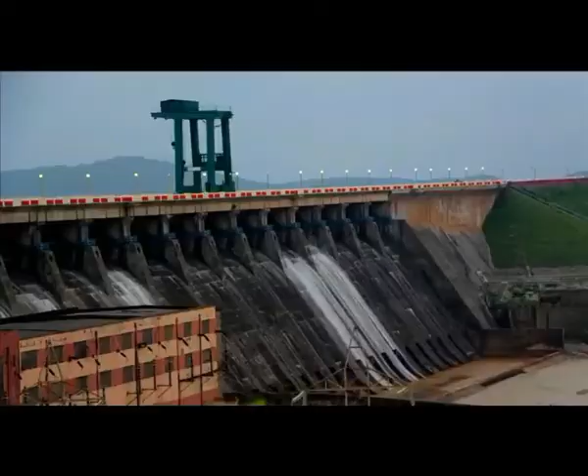For most structures, including buildings, bridges, earthen dams, as well as concrete dams, it is the earth that provides the ultimate support. The behavior of the supporting ground must, therefore, affect the stability of the structure.

The supporting ground is invariably a soil which is weaker than any construction material like wood, concrete, steel, or masonry. Hence, compared to the structural members made out of this material, a large area or mass of soil is necessary, involved in carrying the same load.

Structural foundations are the substructure elements which transmit the structural load to the earth. It is the connecting link between the structure proper and the ground which supports it. The bearing strength characteristics of foundation soil are major design criteria for civil engineering structures.

In geotechnical engineering, bearing capacity is the capacity of soil to support the loads applied to the ground. The bearing capacity of soil is the maximum average contact pressure between the foundation and the soil which should not produce shear failure in the soil.

The load of the superstructure is transmitted to the supporting soil through structural members called footings, which are to be designed properly so as to ensure the shear stress developed on any plane in the loaded soil mass must not be overstressed and does not exceed the shear strength of the soil. In other words, shear failure does not occur.

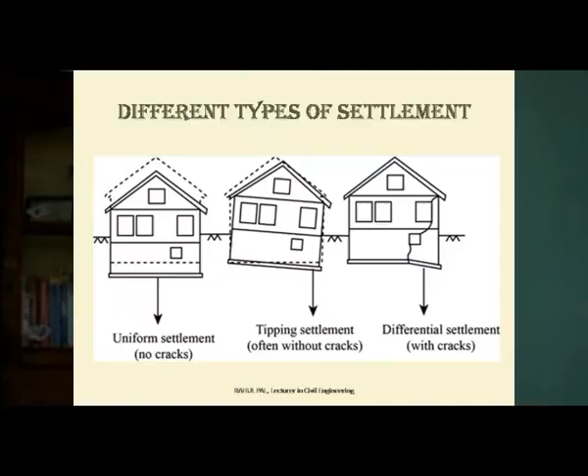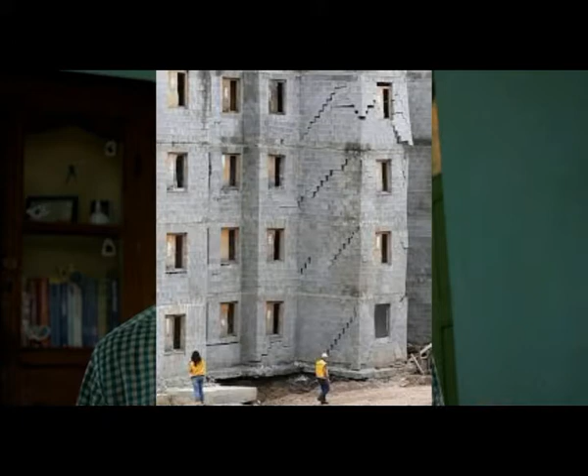Leaving out extreme cases like the Leaning Tower of Pisa, the most common sign of differential settlements is the occurrence of cracks on the structure at an angle of 45 degrees, usually around the openings like doors, windows, etc. Let us now discuss some of the terms related to the bearing capacity of soil.

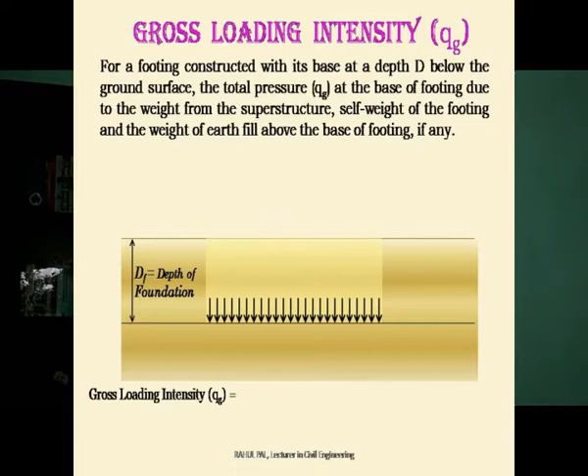For a footing constructed with its base at a depth Df below the ground surface, the gross loading intensity is the total pressure at the base of the footing due to the weight from the superstructure, self weight of the footing and the weight of the earth fill above the base of the footing, if any.

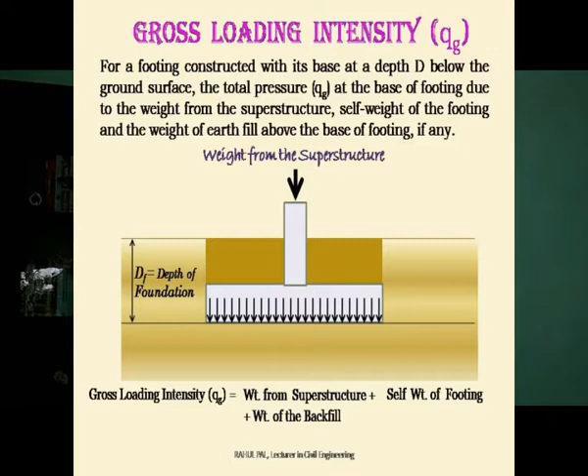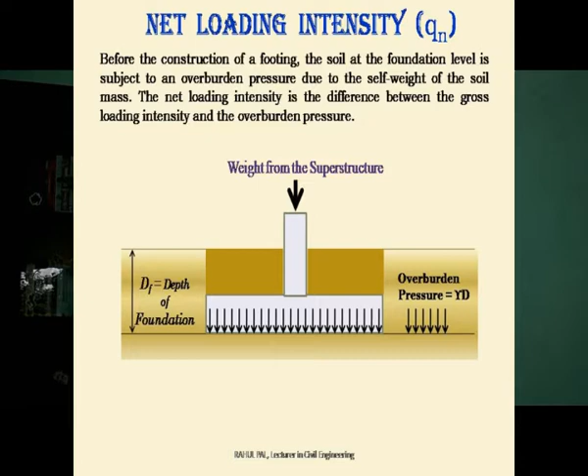Then net loading intensity. Before the construction of a footing, the soil at the foundation level is subjected to an overburden pressure due to the self weight of the soil mass. The net loading intensity is the difference between the gross loading intensity and the overburden pressure.

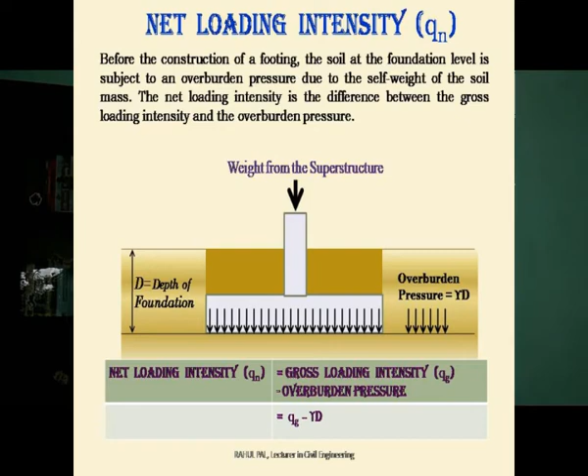If the footing is founded in a soil mass having a unit weight of gamma at a depth Df below the ground level, then net loading intensity is equal to gross loading intensity minus overburden pressure. Then comes ultimate bearing capacity.

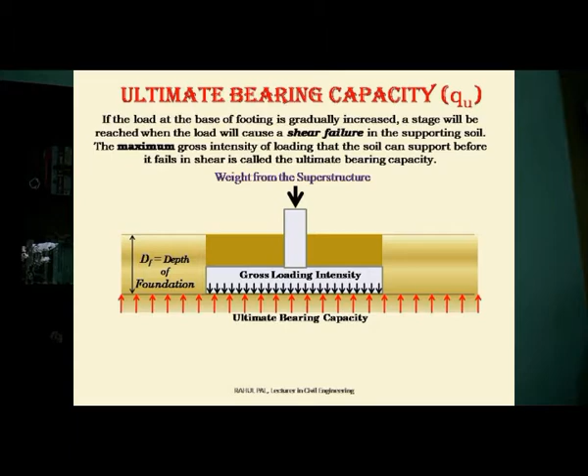If a load at the base of the footing is gradually increased, a stage will be reached when the load will cause a shear failure in the supporting soil. The maximum gross intensity of loading that the soil can support before it fails in shear is called the ultimate bearing capacity.

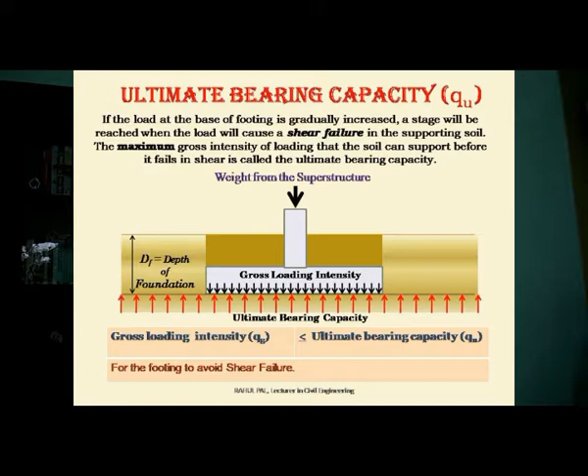So, the gross loading intensity must be less than the ultimate bearing capacity, that is, the maximum capacity that the soil can support. If it is equal to, then it is on the verge of failure.

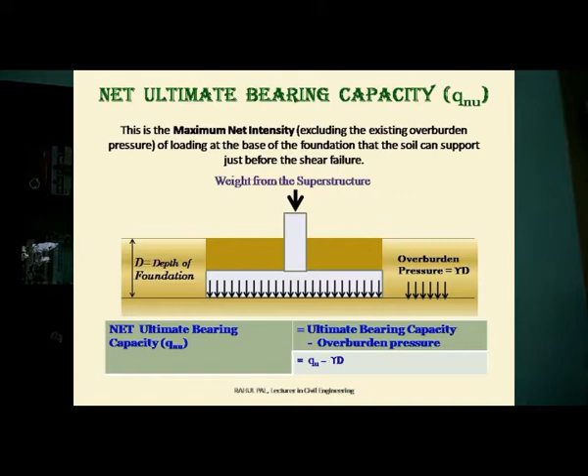Net ultimate bearing capacity is the maximum net intensity of loading, excluding the existing overburden pressure, at the base of the foundation that the soil can support just before the shear failure. Net ultimate bearing capacity is equal to ultimate bearing capacity minus overburden pressure.

Factor of safety. In engineering, a factor of safety, also known as safety factor, expresses how much stronger a system is than it needs to be for an intended load.

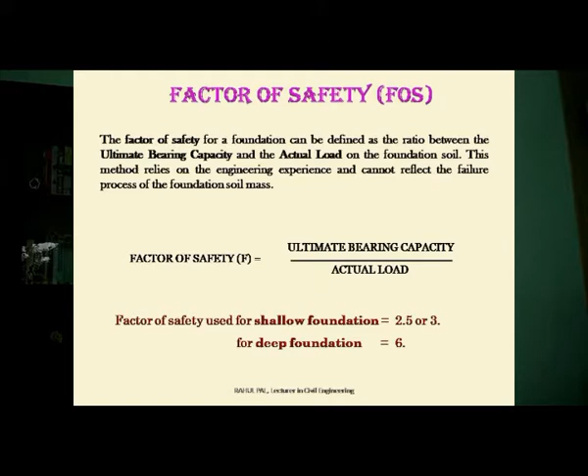The factor of safety for a foundation can be defined as the ratio between the ultimate bearing capacity and the actual load on the foundation soil. Net safe bearing capacity is the maximum net intensity of loading that the soil can safely support without the risk of shear failure. It is obtained by dividing net ultimate bearing capacity by the factor of safety.

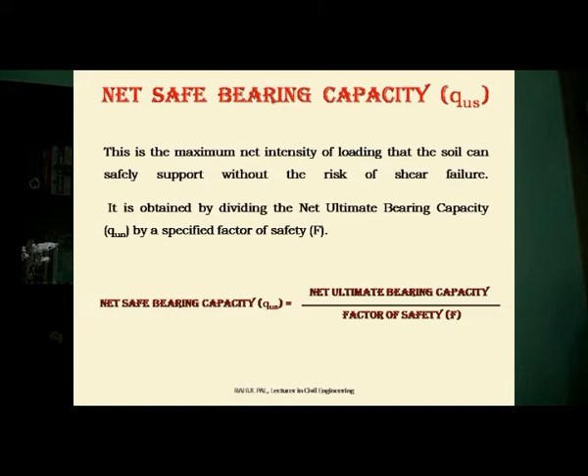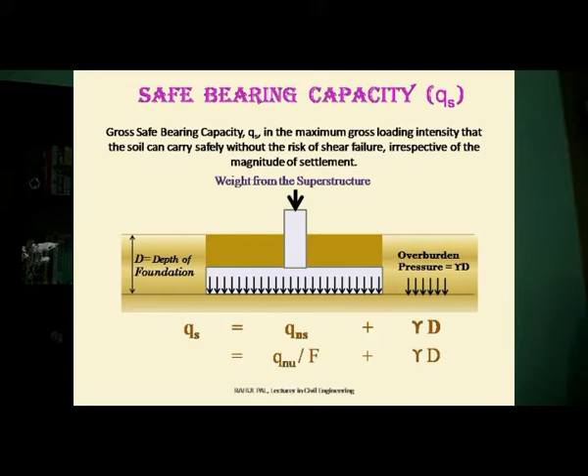Gross safe bearing capacity, denoted by QS, is the maximum gross loading intensity that the soil can carry safely without the risk of shear failure, irrespective of the magnitude of settlement, obtained by adding the net safe bearing capacity with overburden pressure. Finally, the allowable bearing pressure.

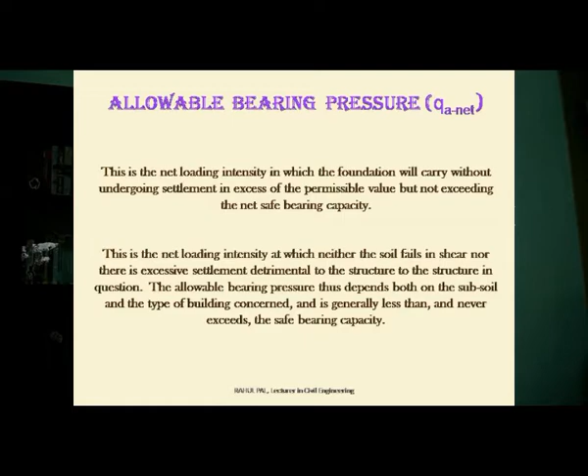It is the net loading intensity which the foundation will carry without undergoing settlement in excess of the permissible value but not exceeding the net safe bearing capacity. This is the net loading intensity at which neither the soil fails in shear nor there is an excessive settlement detrimental to the structure. The allowable bearing pressure thus depends both on the subsoil and the type of building concerned and is generally less than and never exceeds the safe bearing capacity.

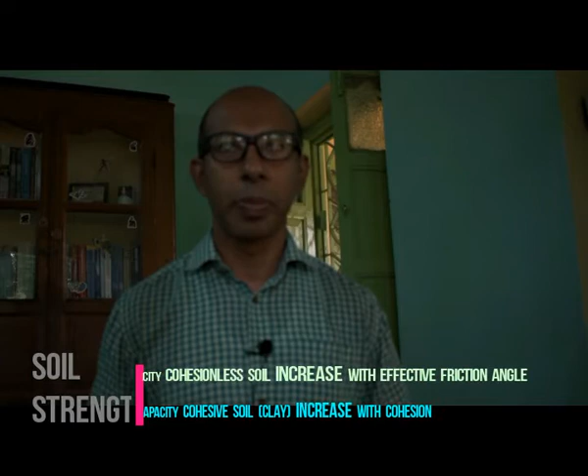The ultimate bearing capacity of soil is influenced by many factors such as, firstly, soil strength. Bearing capacity of cohesionless soil and mixed soil increases disproportionally with the increase in the effective friction angle. However, bearing capacity of purely cohesive soil such as clay varies linearly with the soil cohesion.

Secondly, foundation width. Foundation width affects bearing capacity of cohesionless soil. The bearing capacity of a footing placed at the surface of cohesionless soil, where the soil shear strength is considerably dependent on internal friction, is proportional to the width of the foundation. Bearing capacity of cohesive soil of constant shear strength and infinite depth is independent of foundation width. Foundation depth. The deeper the foundation, the greater the bearing capacity.

Position of the groundwater table has a significant effect on the bearing capacity of soil. Presence of water table at a depth less than the width of the foundation from the foundation bottom would reduce the bearing capacity of the soil. As the water table approaches the ground level, the percentage of submerged soil as well as the pore water increases, hence the effective pressure and the bearing capacity decrease. But when the groundwater table is at a great depth, then it may not affect the bearing capacity of the soil.

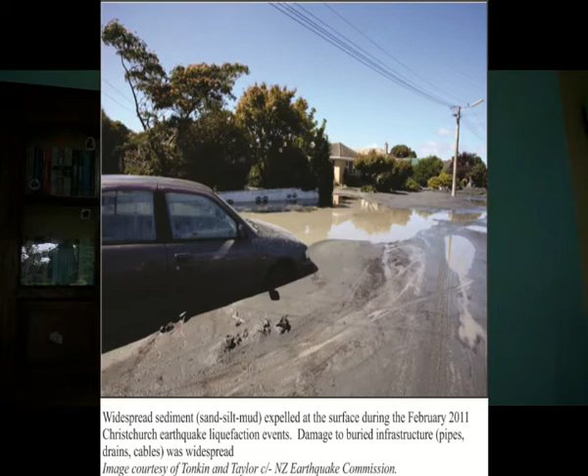The foundation soil can liquefy when the pore water pressure equals or exceeds the soil confining stress. Liquefaction reduces the effective stress to zero and causes gross differential settlement of structures and loss of bearing capacity. Subsurface voids. Bearing capacity of soil decreases due to subsurface voids which are within a critical depth beneath the foundation. The critical depth is that depth below which the influence of pressure in the soil from the foundation is negligible.

Collapsible and expansive soils can have large strength and bearing capacity when they are fairly dry. The volume of the soil changes due to the change in water content. This leads to total and differential foundation movement, which is very dangerous. Black cotton soil is an example of expansive soil. Erosion of soil around and under the foundation and seepage can reduce its bearing capacity and can cause foundation failure.

Low cohesive material such as clay containing a high percentage of silt size particles is mostly susceptible to frost action. Bearing capacity of soft and weak soil can be increased greatly by installing various forms of reinforcement in the soil like metal ties, strips or grids, geotextile fabrics or any granular materials.